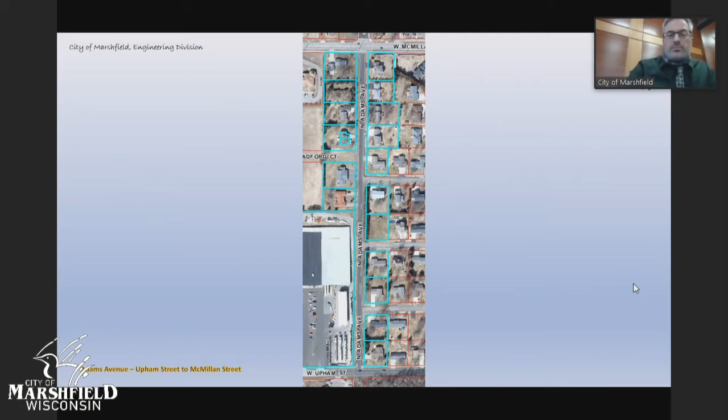The first project we have tonight is Adams Avenue, Upham Street to McMillan Street. This project will be basically just a mill in place street where we do ditching and under drain installation. That's the extent of the work on Adams Avenue.

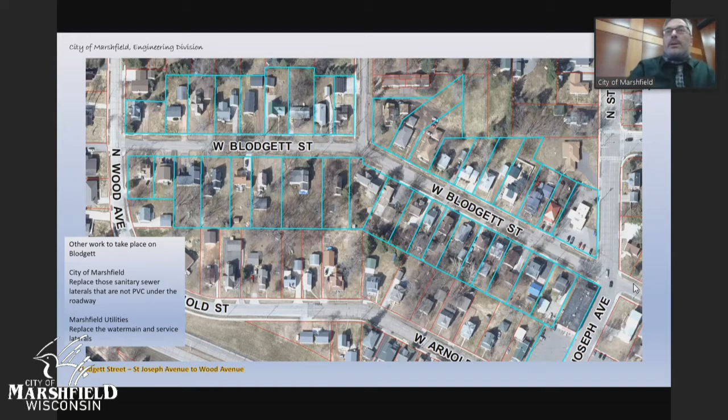West Blodgett Street from North Wood Avenue to St. Joseph Avenue. This project is going to be a little more involved. We are actually going to replace all the sanitary sewer laterals on this project up to the right-of-way that are not currently PVC. The water utility is also planning to replace water main on this project and water service laterals. So this is going to be a pretty extensive project. In fact, we are bidding this one out and not doing it with street department crews.

The next project I have is West Briarwood Street. This project is just a mill in place with ditching and under drain.

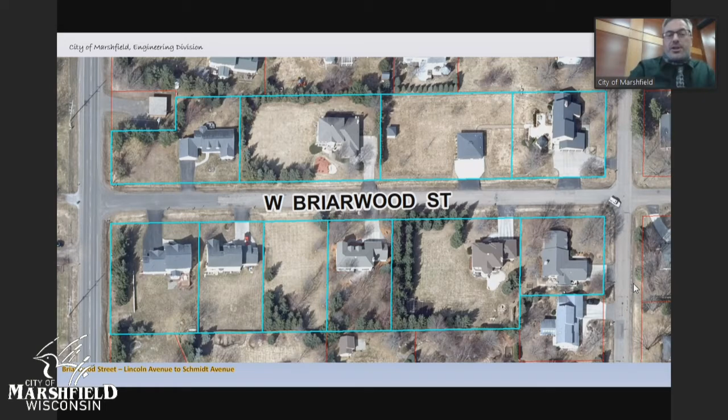And then South Cedar Avenue from 6th Street to 8th Street. We are going to replace sanitary sewer laterals on this project and some sanitary sewer main from 7th Street to 8th Street. And the water utility is going to replace water services on this project within the limits of 6th to 8th.

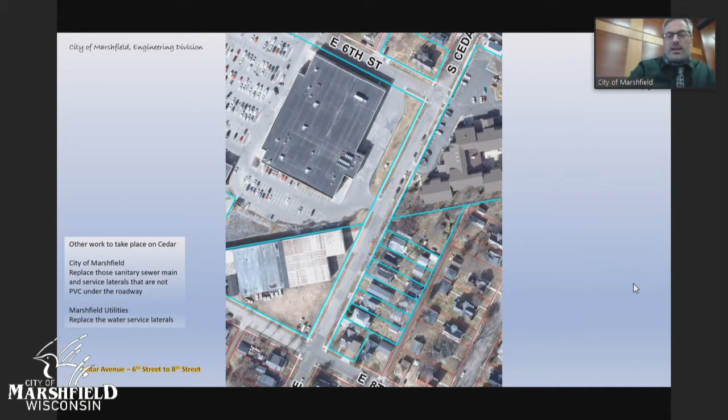On this next project, we have West Park Street from Adams Avenue to Clark Avenue, and then Clark Avenue from Arlington Street down to the cul-de-sac to the south. On this project, the water utility will be replacing water main and water services, and the city will come back and follow through with ditching, under drain, and new pavement for the entire project.

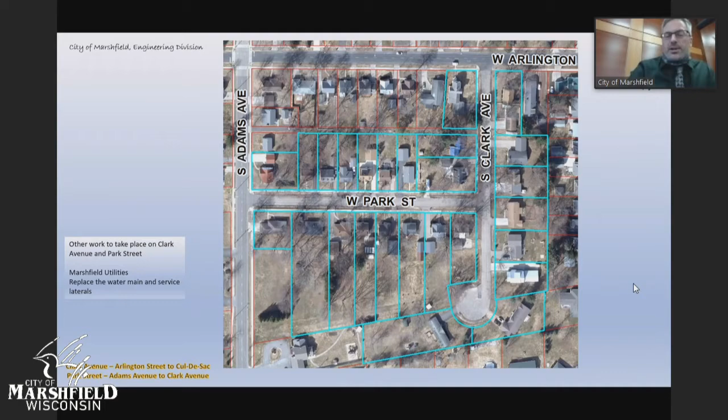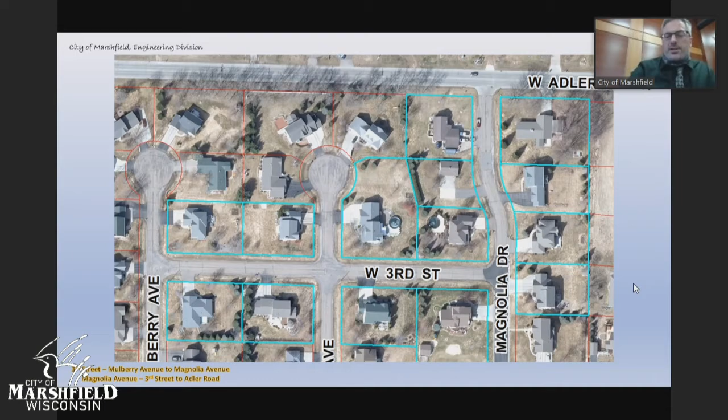This project is West 3rd Street from Mulberry Avenue to Magnolia Drive, then Magnolia Drive from 3rd Street to Adler Road. This is just a ditching project with mill in place and under drain installation.

We have Laurel Court, and this will also just be a milling project with under drain installation and ditching.

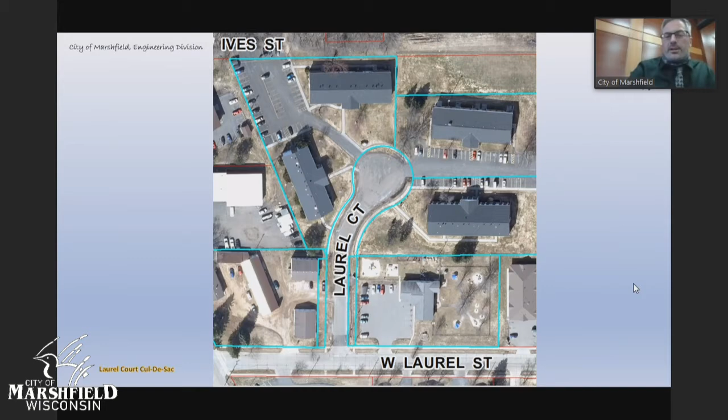So the typical progression of events that take place in our projects is we begin with the ditching, where we get rid of some of the excess material, put new drain culverts in, and drain tile under the bottom of the ditches to help keep the ditches dry.

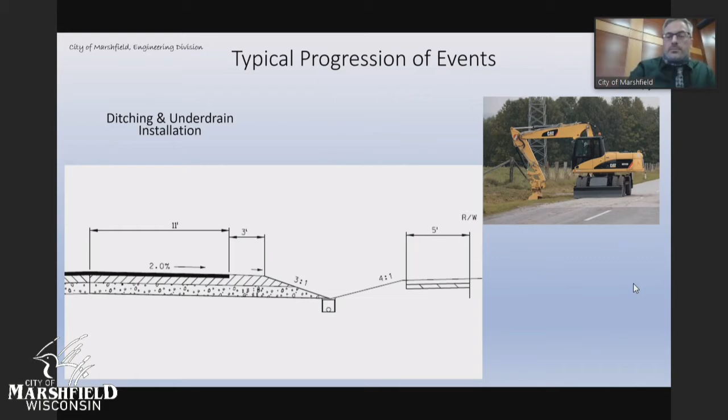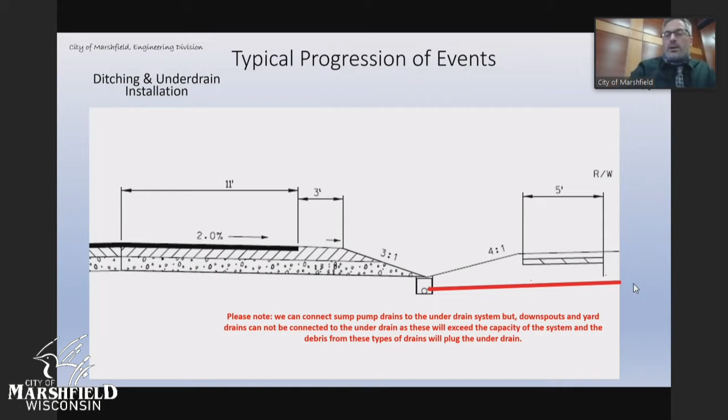With that drain tile, we do allow sump pumps to be connected to the drain tile system. If you have it buried out to the ditch right now and it drains out there, we will connect that to the under drain system. But if it is connected to downspouts or yard drains, we do not connect them to the under drain system, because that will plug the under drain system and render it unusable for people who do have sump pumps tied to them.

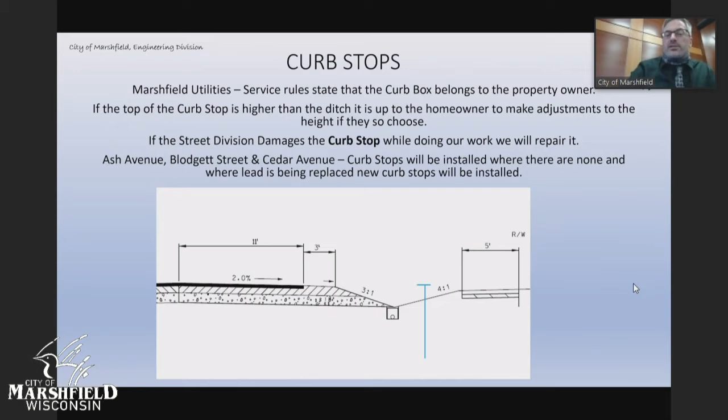Marshfield service rules for curb stops: the curb stop belongs to the property owner. If the curb stop is higher than the ditch, it is up to the homeowner to make those adjustments to the height if they so choose. If the street division damages a curb stop while doing their work in the ditching, they will make any repairs necessary. On Ash Avenue, Blodgett Street, and Cedar Avenue, curb stops will be installed where there are none, and where lead is being replaced, new curb stops will also be installed.

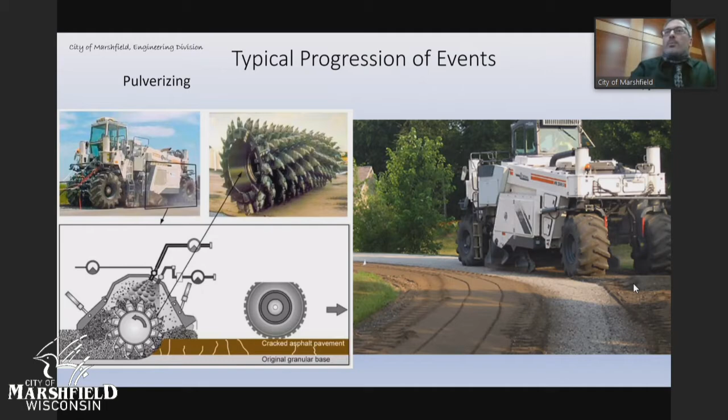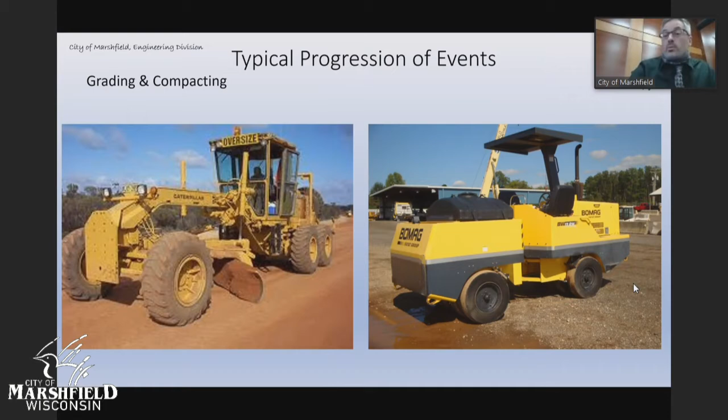Following grading or the pulverizing, they basically grade and compact it, and you can drive on it even right around the pulverizer, so it's not too inconvenient at that point. Then at some point, they'll come back and adjust any of the manholes in the street to the new elevation of the street.

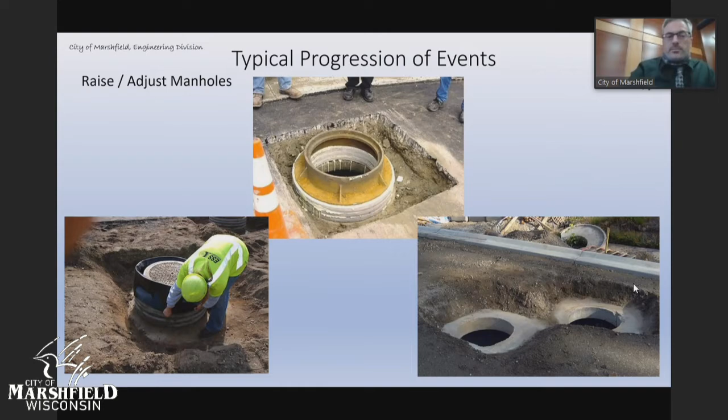Then they start the process of paving. At this time, when they actually do the paving for these projects, we like to have residents stay off the streets for about 24 hours to help the pavement cool. This will keep the pavement clean from marks and ruts that may occur while it's still hot.

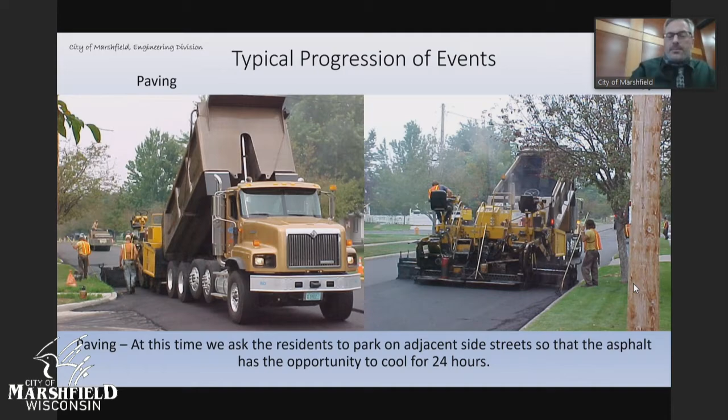And then finally, there's shouldering, and we typically use recycled asphalt for the shouldering material because it holds together much better.

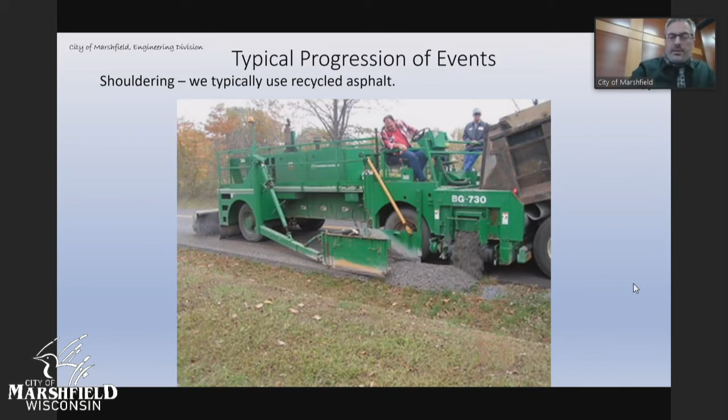So the construction schedule is something everyone likes to hear about when they come to these meetings. Right now, we don't have any scheduled dates for construction. Tim Rasmussen, our assistant street superintendent from the street department, will be scheduling these projects and setting up the pulverizer, the paving, and the ditching. We'll have more information at another public informational meeting once the plans are completed for these projects.

Pulverizing is typically scheduled based on the equipment, and the same with paving, and those are both done by American Asphalt. The issue is that if it rains, the paving or pulverizing can change immediately or be disrupted. So what they try to do is keep residents notified of the progressing work by putting door hangers on homes in the various project areas to let people know when they're going to start work in the neighborhood, when they're going to do milling, and when they're going to do paving.

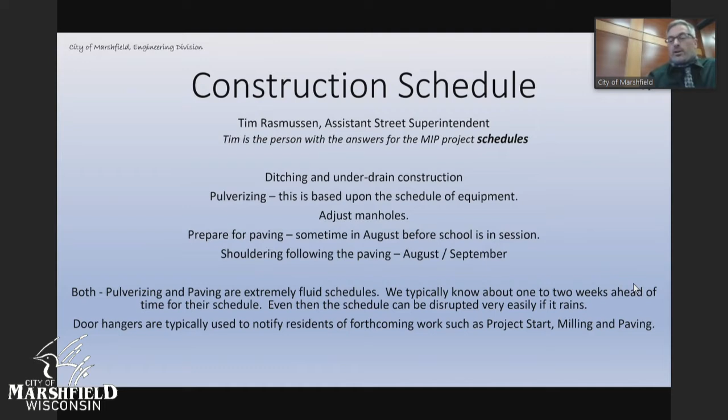So the sequence of events for mill in place projects: we have adoption of the budget in November, we begin survey in August and September, and we have our initial PIM here in February. Preliminary resolutions are going to the Common Council tonight. Then we do the design and start getting the project ready for construction.

In April, you'll see mailing of the estimated special assessments, which includes a notice of public hearing, installment assessment notice, report of the city engineer, and a Schedule D including what we estimate the special assessments to be. Then we have another PIM with the design and special assessments to discuss, along with final plans, and construction should begin fairly soon after that, generally around April or May.

Final assessments won't be calculated until next January, and it's based upon what is actually used at your property location, each property specific to what's adjacent to it. Final assessments don't get mailed till next March.

Some of the things we'd like to know about these projects are access considerations. We'd like to know if you or a neighbor requires specific access requirements during these projects. We'll try our best to work with you to maintain access when possible. If there's a disability, or if a neighbor receives Meals on Wheels, if we can get that information, we'll try to make it as easy as possible. We try to be as accommodating as possible, but with the type of work that takes place, sometimes access cannot be maintained at all times.

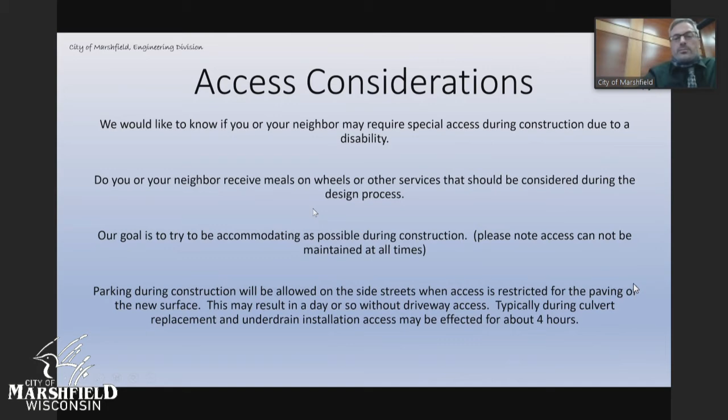So how are services affected during construction? On these projects, mail will be delivered as normal, and trash and recyclables should be picked up as normal. The street department will work with residents if there's any disruption, especially if we have excavation taking place that makes it more difficult for equipment to get through. We'll work with property owners on that.

Water service will not be affected during construction, except on Blodgett, Ash, and Cedar. There will be short service disruptions as they put in temporary water main to provide service while they replace the main and service laterals on those projects.

Please note, Marshfield Utilities does have a program to help replace lead and galvanized water services. You can contact John Richmond or Erick Boon at Marshfield Utilities at 715-387-1195.

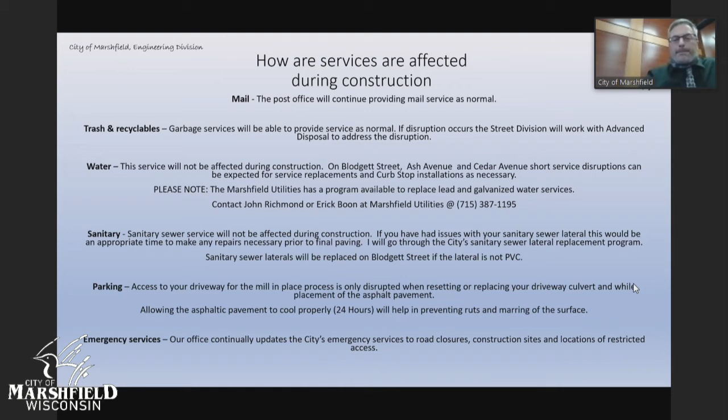So how can you prepare for the project? You can begin financial planning for the special assessment, coordinate any landscaping, driveway placement, or other construction plans you may have. Now would be an opportune time to lengthen the driveway culvert if it's not wide enough. Please note the maximum allowed by city policy is 40 feet. Ask questions of our staff, and we'll work with you to make these projects as easy as possible.

So funding - we talk about special assessments with these projects. The city ordinance reads that pulverizing and paving are assessable items. These are based upon a one-third cost share: 1/3 of the cost is assessed on homeowners on one side, 1/3 is assessed on homeowners on the other side, and the third is funded by general tax dollars.

Driveway aprons are also assessable. Driveways that are paved as follows: gravel aprons will be restored in asphalt, asphalt aprons will be restored in asphalt, and concrete or brick paver aprons do get restored in asphalt. Special note: end wall treatments are not replaced. That is the responsibility of the property owner to replace on their own if they would like to restore those.

So when we take a look at how we grade each of these driveways: gravel driveways are graded as poor with no credit. Asphalt that is cracked and in fairly decent shape gets a 50% credit for driveway paving. Asphalt with no cracks, typically 3 to 5 years old, gets an 80% credit. New asphalt driveways can receive up to 100% credit.

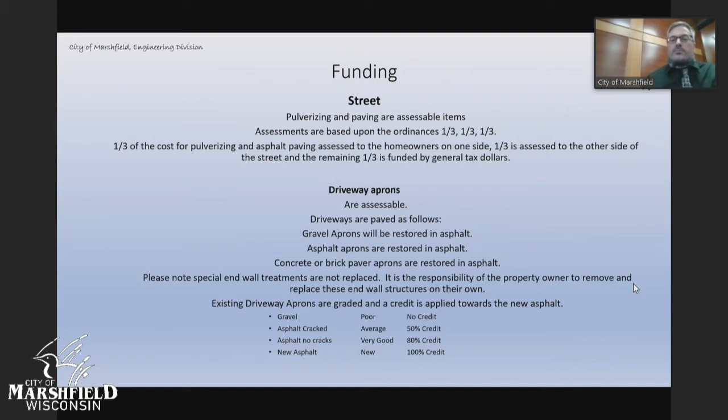Ditching is not assessable - this includes the installation of the under drain. Sump pumps can be connected again, but we cannot connect downspouts. We do that at no cost, as long as it's stubbed out to the ditch.

The property owner is responsible for the cost associated with of culvert lengthening and replacement. In some instances, if the culvert is in decent shape or has been replaced at some point in the past - let's assume a property owner may have a plastic culvert already that's in good shape, and we just add under drain underneath the bottom of it, we can reuse the culvert, then there's no cost to the homeowner for that culvert. The culverts we typically use are called HDPE, or dual wall black plastic.

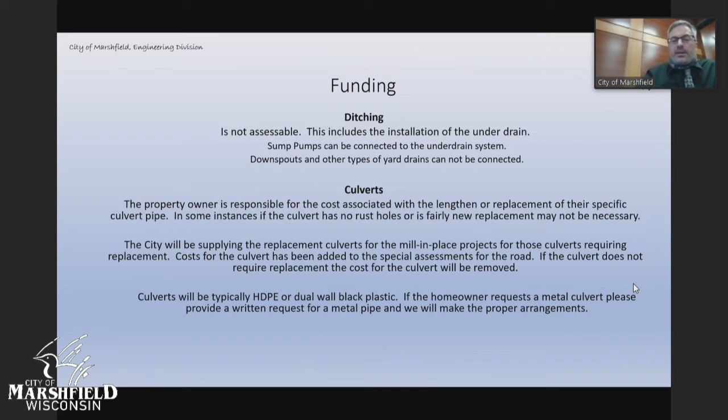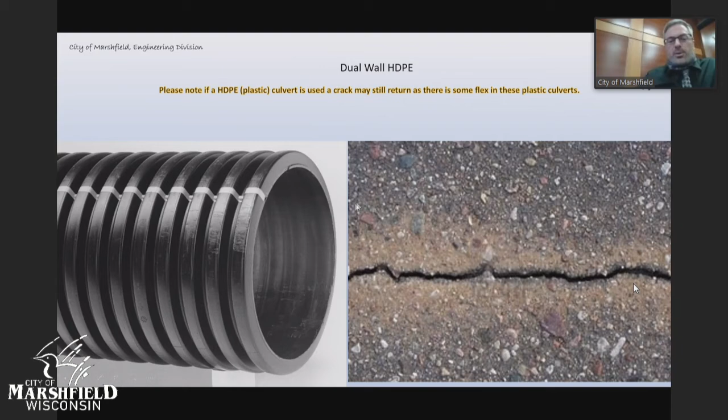If the homeowner requests a metal culvert, they can do so by written request. The reason we give that option: the HDPE culvert pipes are very cost effective. We order those and put them in as part of our project, so we get them at a very good cost, and that cost is shared with property owners. But even so, we do anticipate after these projects are done there will be some type of crack that appears across the top of those culverts. You can go with the galvanized metal culvert or aluminum culvert pipe - you will most likely see the same type of crack. It will take longer to appear, but it will at some point crack too, due to frost in our soil.

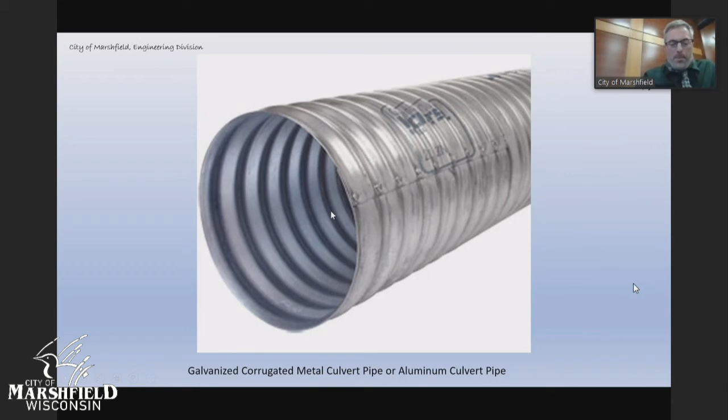So, our sanitary sewer lateral replacement policy. Now is a great time to take a look at your sanitary sewer lateral. The city will televise your lateral at no cost to you as a homeowner. All we need is access to a sanitary cleanout. If you've had root problems in the past, they'll need to be removed before televising can be effective. Addressing your sanitary sewer lateral now can save a road cut in the future, which helps with the longevity of our new roadways.

The city has implemented an incentive for lateral replacements, which I'll discuss further. To schedule televising, just contact our Marshfield wastewater treatment plant. The number is on the bottom of the invite: 715-486-2007.

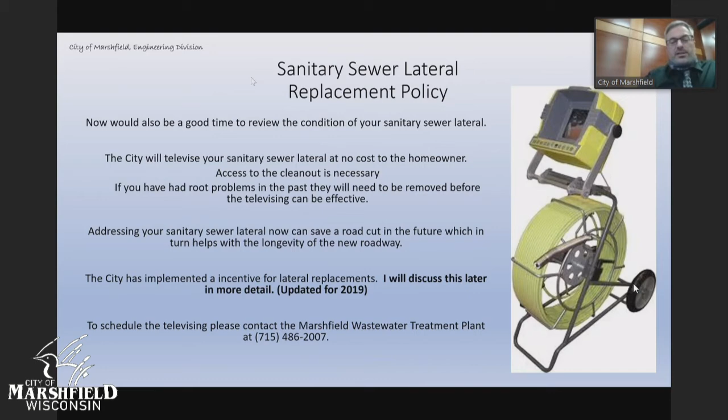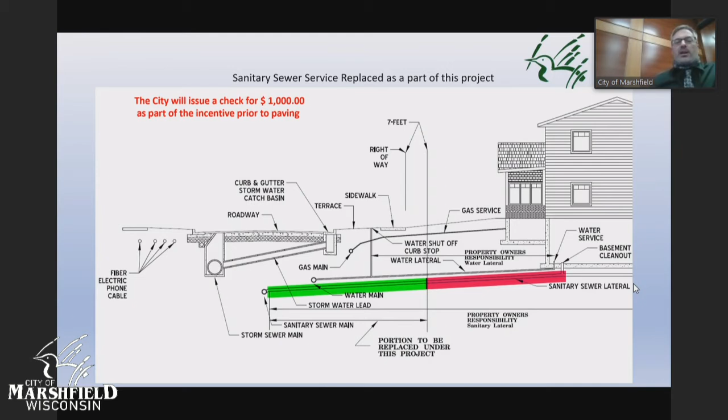On Blodgett Street, we will be replacing the sanitary sewer lateral from the main to the property line, like what we've highlighted here in green. If a property owner chooses to replace the remaining portion by hiring their own contractor or plumber to replace it from where we stop to the basement or house, the city will issue a check for $1,000 as an incentive to hire your own plumber to fix the sanitary sewer lateral.

So in the instance of Blodgett Street and Cedar Avenue, where we're replacing sanitary sewer laterals, we can estimate a replacement cost of about $1,250. If the homeowner replaces their portion in red, which is the cost of hiring their own plumber, the city will forgive the special assessment portion at $1,250 and pay the property owner an additional $1,000. So ultimately, if you replace your sanitary sewer lateral like on Blodgett Street, you could end up saving probably around $2,250.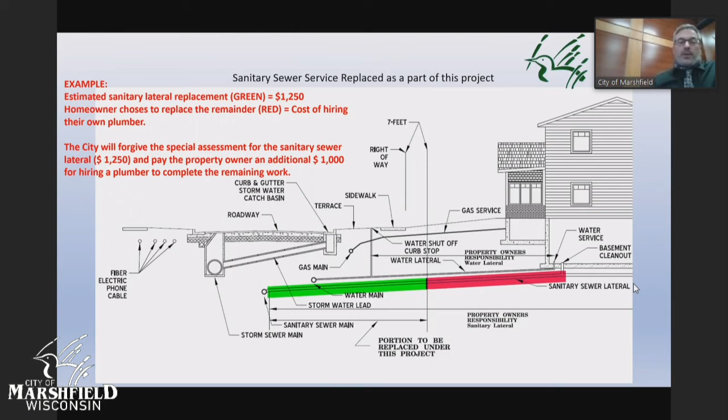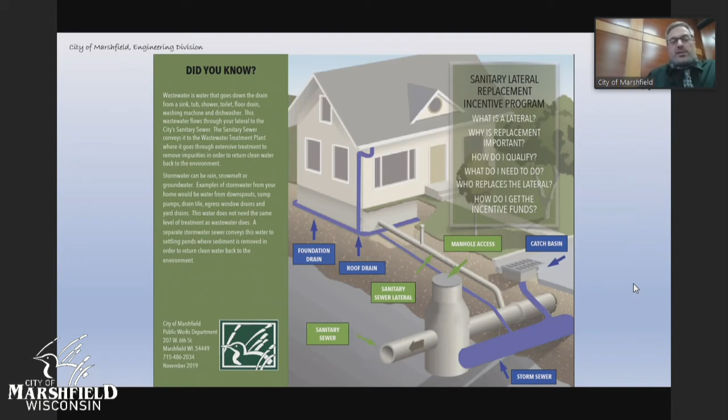This is a brochure we'll mail out with the next public informational meeting that talks about our sanitary sewer lateral program again. I won't go through this in great detail, but it's also available on our website.

Marshfield Utilities right now has a program to assist homeowners replacing their water services to the house. What they want to do is remove all lead and galvanized services within the city, and they will pay up to $3,000 to help assist in replacing that water service to the house. You can contact John Richmond or Eric Boone with the water utility at 387-1195, and they'll work with you to try to do this.

Right now, the program has a sunset clause date of June 1st of this year. So any work to try to receive payment or benefit from this has to be completed before June 1st of this year.

So when we talk about laterals and lead and galvanized water services, we do have a special pilot program going on for sanitary sewer laterals where we can assist with $1,000. With the water main and lead and galvanized water replacements, a homeowner can save quite a bit of money on replacing their water and sewer services as part of these projects. Getting it done ahead of time saves a lot of cost and effort in the future, and also helps with the longevity of our streets.

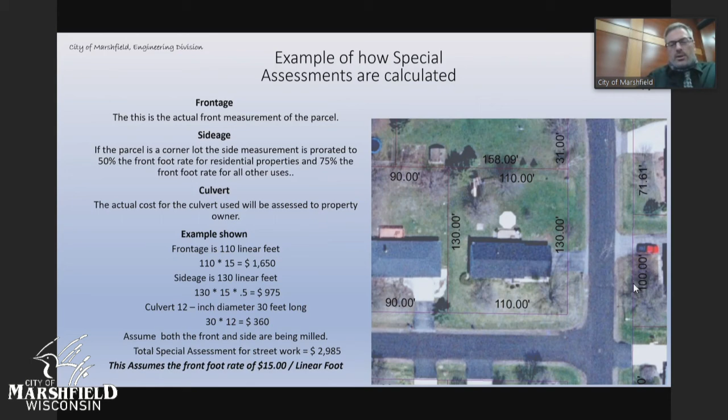And most parcels don't have corner lots. We're not doing, in a lot of instances, corner lots in these parcels, but I'm just using this for an example.

Assume they want to widen the driveway, adding another 5 square yards of pavement — that gets charged at the full rate, adding approximately another $150 to the overall special assessment. So in this instance, they would have a final apron cost of $525.

Taking the cost from that previous street example, along with the driveway assessments, you have a total assessment of about $3,510.

I use $15 a linear foot because it's higher than what I anticipate the estimated special assessments to be for this year, and I know a lot of people remember that number almost instantaneously. It's a little easier to give you a number that's closer when we get the actual estimated special assessments.

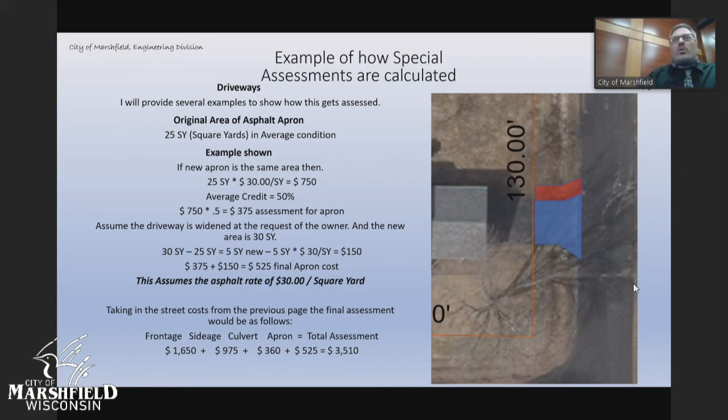Some of the things we're looking for from you as a resident are information that doesn't get located by Digger's Hotline. So if you have a sump pump discharge where the service line is buried and we may not see it, we'd like to know where that is so we can work with you to get it located.

Any private underground utilities, buried irrigation systems, pet containment, or buried underground power owned by the property owner that's not located by Digger's Hotline — we'd like to know where that is, along with any issues you think we should review during our design process. Miscellaneous items and other things are great to bring up at these meetings, and you can give us a call if necessary.

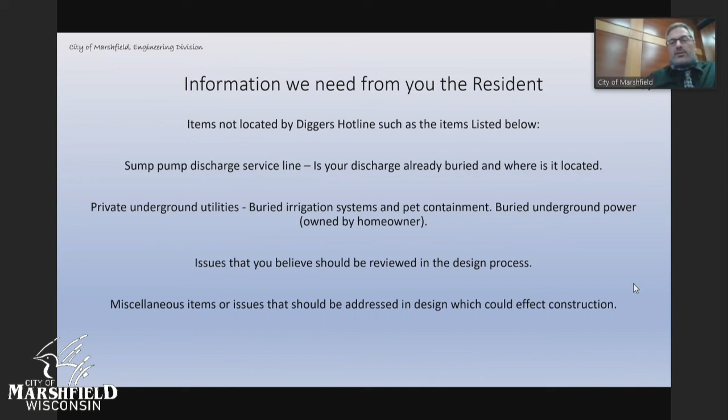So how do you give us input and stay informed? You can reach me — my email address is on the letter that was part of the invite. It's tom@ci.marshfield.wi.us, or you can call City Hall at 486-2034, or stop in. Our website will have a copy of this PowerPoint presentation on it later this week, so you'll be able to review it at any time at your convenience.

So do you have any questions for us?

Well, I do want to thank everyone here for attending. We've had double the attendance that we had at last night's meeting, and I'm hoping some people are watching online. We have several people I think are watching on the Zoom meeting, so. Sure.